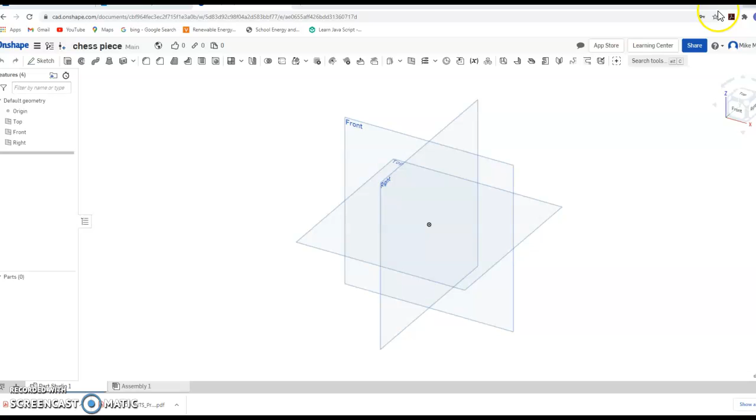Okay, so we're going to make a chess piece using some of our higher level skills, and we're going to go through this quickly because it's a little extensive.

So we're going to sketch. We'll tell it where to sketch on here. Select the sketch plane, click right here. Got our circle, we're going to show you how to make a sphere. All I do is choose a circle, click, drag, click.

We've done this before, but it's a little bit tricky. Wow, I didn't do anything. I didn't click out of this stuff, so I left it like that.

I'm going to go get my line tool, and I'm going to click on one side, right through the middle to the other side, splitting the circle in half. Now I'm going to hit escape to get rid of that line tool. Go up to my trim tool, and it knows that by splitting it, I wanted two separate half circles.

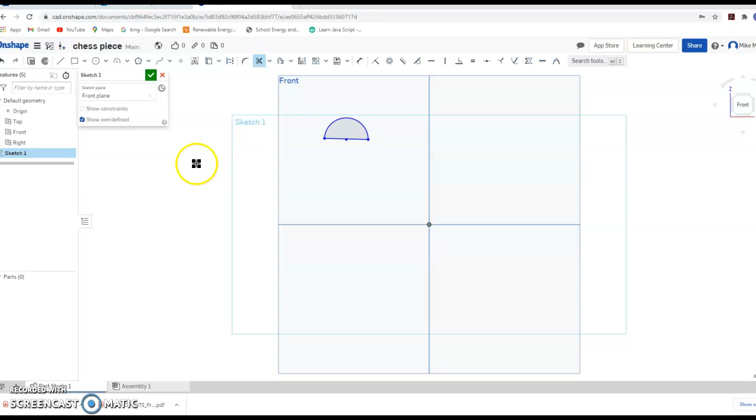So I'm going to click on the bottom. Now I have half of a circle, a semicircle. And in order to make this into a sphere for the top of my chess piece, I'm going to go to my Revolve tool. Notice this red part over here is asking me for a Revolve Axis.

An axis is like a line you could spin something around. So I'm going to click on the red thing, and now go tell it which axis I want to spin around. The only one I really have available is that line right there. So I'm going to click, and there's my sphere. So that's the top of my pawn, which is what I'm making here.

Now we're going to do something else. I'm going to right click, choose isometric. I'm going to remind you about the offset plane. Notice I highlighted front by putting my cursor over top. I'm going to right click and choose offset plane.

It's got it, this window popped up. The offset distance is 1 inch. Notice that we now have the front plane and then this plane 1. We can sort of see there, it's 1 inch away. I could change that just to show you what the plane is. If I said 2, it pushes it further away. If I said 0.5, a half an inch, it puts it pretty close. Let's go back to 1 inch.

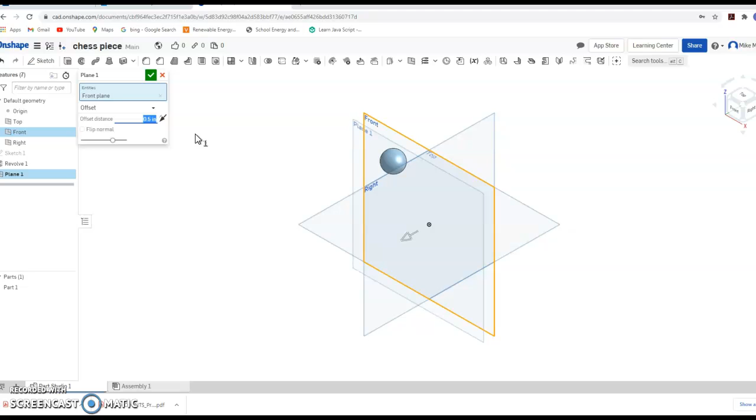And we need the offset planes for this next piece, or this next tool. Let's look back at the front, and a little bit on the side to make sure we have the right thing. We're going to use the Loft tool, but in order to do that, we need to make a couple sketches.

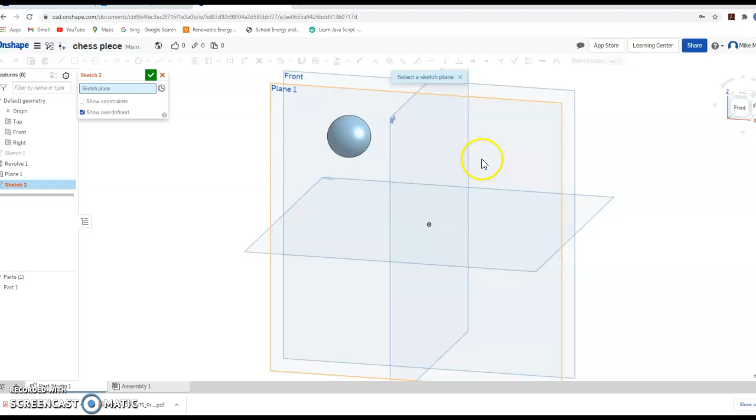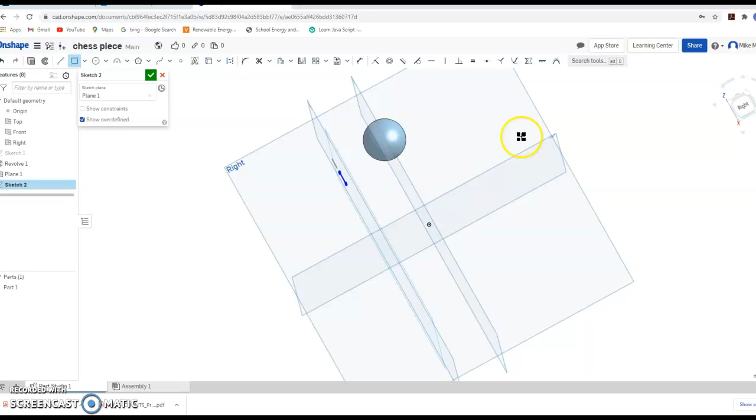So I'm going to say sketch 2, and notice plane 1 is chosen. So I'll click on plane 1, and I'm going to make a rectangle over here. Let's look at it directly again. There's one rectangle on plane 1. Let's look at it on the side again, and spin all the way around so that we now select.

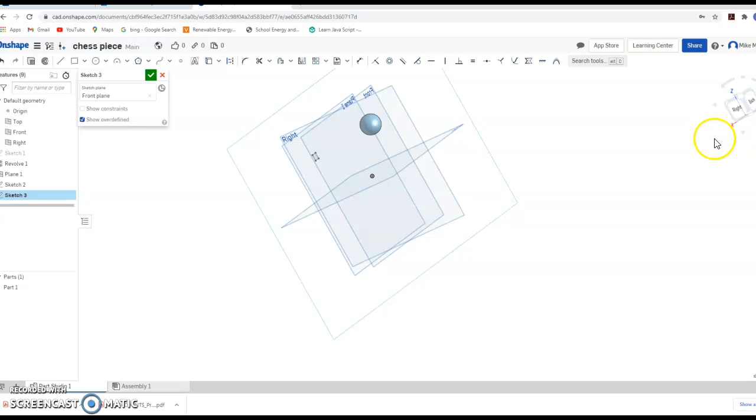I think I have to accept that. I'm going to go ahead and accept that first sketch, and now make another sketch on this guy, which is my front plane right there. You can see that I have front plane selected. So I'm going to click on that, and let's look at this from the back. I'm going to put this right over top of that, but remember that's actually ahead of the other plane. At least I hope it is.

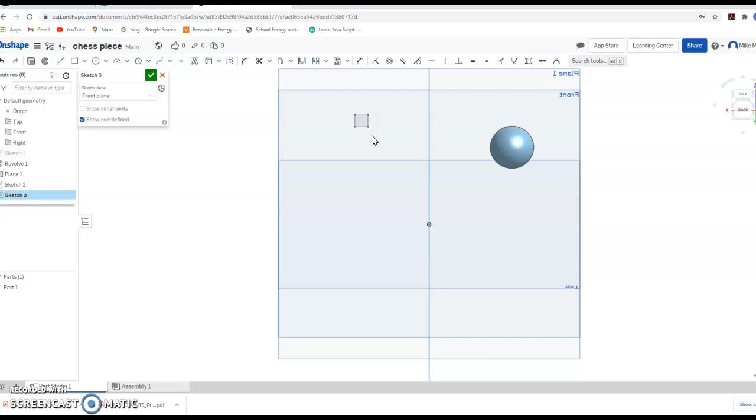Alright, let's do this. Make a corner rectangle, make this one bigger, and check mark that. Now we're going to choose our Loft tool right here.

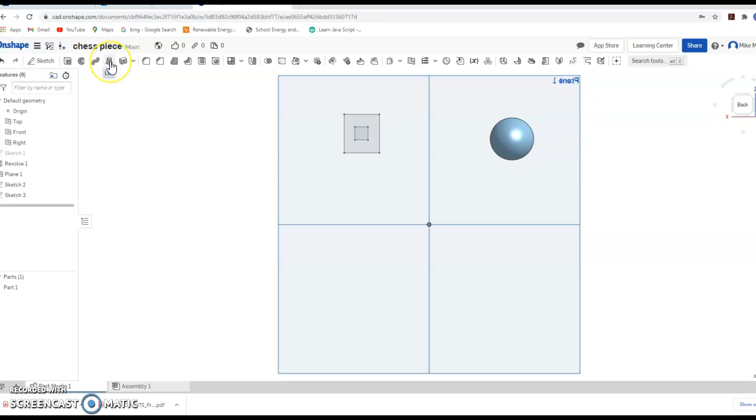Once you have the two sketches on the two different planes, it's pretty easy. I'm going to click on my Loft tool, and it just wants me to tell what two things I'm connecting. So I'm going to click on this guy, and click on that guy, and it makes it. So that could be the base of my pawn. If you connect these things, you can make them into a pawn.

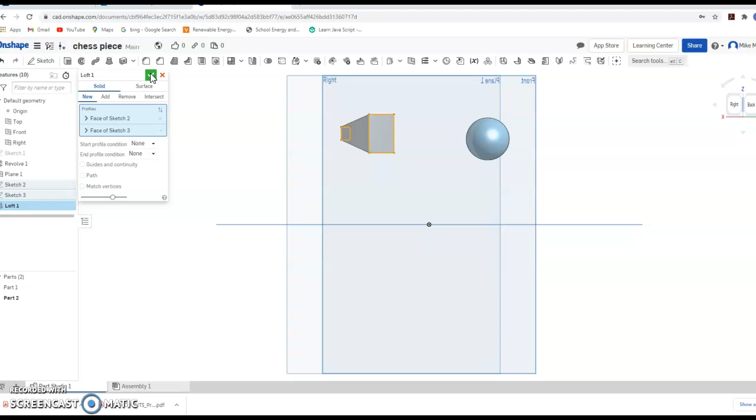So we're at 4 minutes, I'll do that quickly. I'm going to go to Assembly. Once I'm in Assembly, by the way, that was down here next to Part Studio. If I go back to Part Studio, I can see my stuff.

I'm going to Assembly, and I go to Insert, and I can pick this part 1, drag it out. Sometimes it takes a little while. Let's try part 2 and see what it does with that.

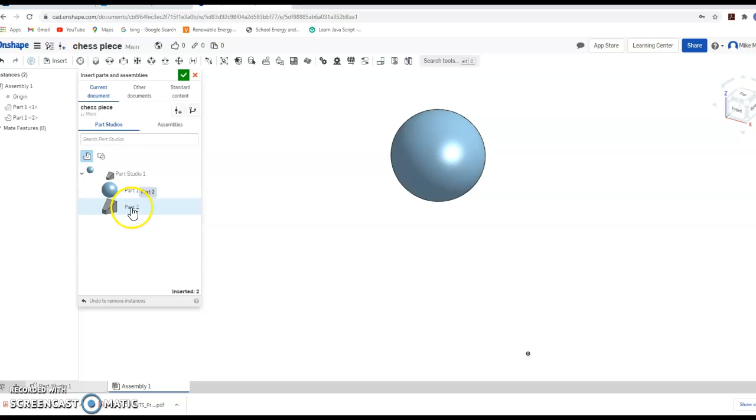I decided to double click for some reason, not sure why. There's my head, there's my base. And then I'm going to check mark that, say okay.

Now we're going to use this fasten mate up here. When I do that, you'll see this sort of target thing looking. I can attach any part I wanted.

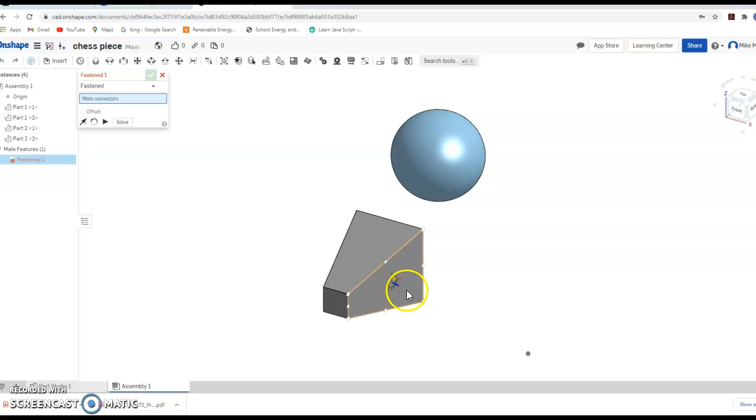So let's say I did this, and I click there, and then, oh, see, there's my target up there. Oh, it puts it like that. It put this piece right there on there. Well, that's not what this one should look like.

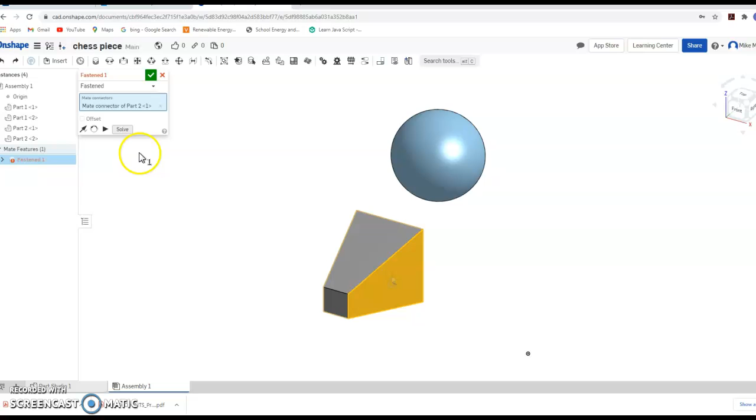So let's undo that, and instead let's say that might be the target for that. See, we're on the edge now, not in the middle, right there. And that's not what we wanted either. This thing flips, and there it is. There's my chess piece.